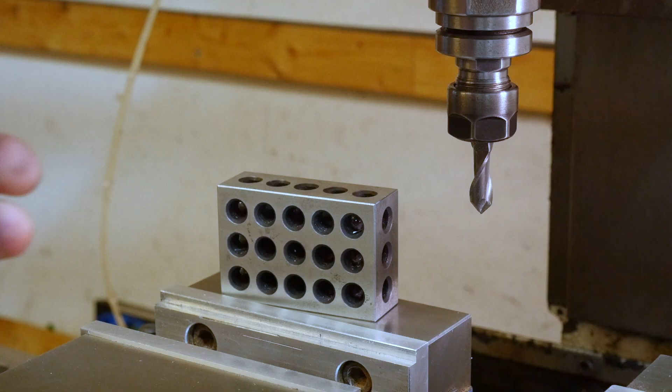One of the most commonly asked questions I get about Centroid is about tool height offsets. So if you're going to be CNC machining a part with a program that's using more than just one tool, we somehow have to communicate to the control how much each tool is sticking out of its tool holder, right? Like if you need to use this tool and this tool in your program, the control doesn't know how much each tool is sticking out. So you've got to tell it that.

And it's a simple concept, but the details of it sort of confused me for longer than I care to admit. So in this video, I'm going to do my best to explain exactly how it all works and what's going on in the control when you're setting tool height offsets, how to turn them on and off, and what it all means. And I think the best way to start is to sort of forget all about tool height offsets for just a second.

This is a 1-2-3 block, which means this edge measures exactly 1 inch, this edge measures exactly 2 inches, and this edge measures exactly 3. So I've set the top of this vise jaw to be Z0 for this tool. So if we go over to the control, this is the home screen in Centroid. Now you see mine has a black background, but that's just because I've changed it. Yours is probably blue. That's okay. All the buttons and things are going to be the same. It just looks a little bit different.

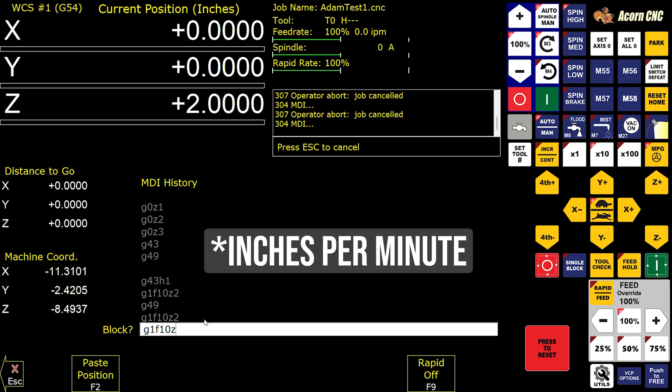So if we go to the MDI down here, this is the manual data input screen. We can go ahead and just start typing G-code in here. So we do something like G1, which is a feed move. So let's give it a feed of 10 inches per minute. And we're going to say we want to go to Z position 1. We hit cycle start. And we can see that the tool is moving to a height of Z1. You can see on the control, we stop at 1 inch.

And when we put the block underneath the tool, we can see that it just barely fits under the tool, which means that the tip of this tool is at a Z height off of this Z0 plane of 1 inch. We can do the same thing. We can go G1. Let's move a little faster. Let's give it a feed rate of 30, and let's move to a Z position of 2. Let's hit cycle start. We can see the machine moves up, and now we are exactly 2 inches off the top surface, which is our Z0.

Let's go up to 3. Now instead of G1, we can use G0. This is a rapid move. We don't have to put in a feed rate because our rapids are defined in the control. But let's go up to Z3, hit cycle start. And now we can see that our tool is exactly 3 inches from the top surface.

But things get a little different when we change the tool. So let's go ahead and change the tool to our tool number 1. We can see that this tool sticks out a lot less than the chamfer tool that we were using previously. So let's do a G1, feed rate of 30 inches per minute, and let's go to a Z position of 1. When we hit cycle start, the machine is going to move down,

and now it is no longer at the top of this block, right? This is exactly 1 inch above our Z0, but we've put in a different tool that sticks out a different amount. And without telling the machine how much more or less it's sticking out, it's not going to be at the top of the block or in the position we need it to be. So now let's talk about this concept of tool height offsets.

In Centroid, up here, you see H dash dash dash. There's no numbers here. There's dashes instead because tool height offsets are not enabled. To enable tool height offsets, there's a G-code, it's G43. So let's just go ahead and type in G43 and keep your eye up here on the dash dash dash. We're gonna hit cycle start on G43, and here you go, we have H1 enabled now.

If we want to turn off tool height offsets, we just go G49, and now we're back to H dash dash dash, and there's no height offset enabled right now. So I told you that was tool number 1. I do have the tool height offset already set.

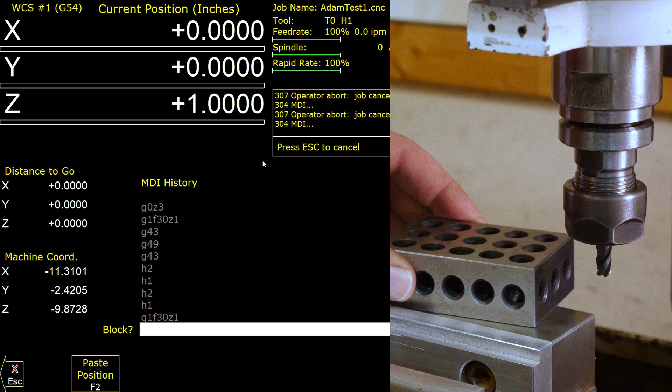So let's go ahead and tell the control to move to a height of Z1 when we have tool height offset 1 activated. And let's see what happens. Okay, so the tool moves down, and now we're exactly at the top surface of this 1-2-3 block. We're 1 inch above this surface.

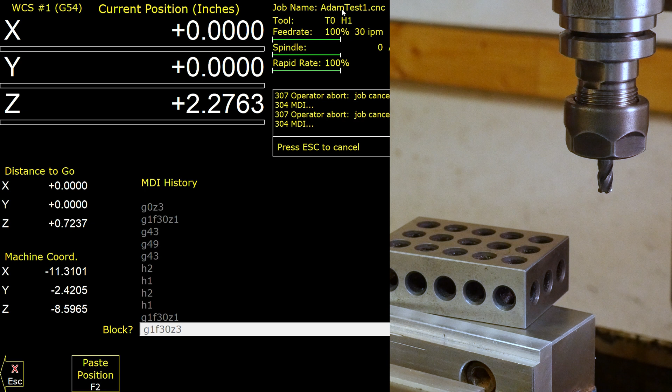Let's give it a G1 with a feed rate of 30, and let's move to a Z height of 3 inches. Let's hit cycle start. We still have height offset 1 activated. We see that we're exactly at 3 inches off of Z0 with height 1. And when we check with our 1-2-3 block, we're indeed right there. The tool is right at the top of that 1-2-3 block, just barely. I can feel it rubbing. So that's perfect. Now let's go ahead and change our tool to our tool number 2.

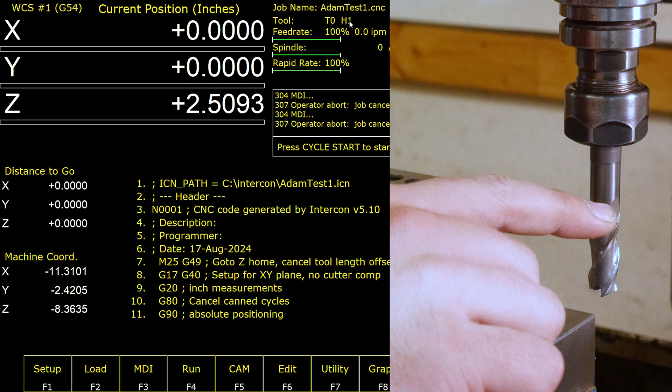Okay, so we've got our tool number 2 installed into the machine, and here we've got to be really careful, right? Because this tool sticks out a heck of a lot more. So if we don't have the correct offset set and the machine thinks we've got the stubby tool in there, well, we're going to crash right into the vise. We're going to hit something. So this is my tool number 2. Let's tell the control that we've got tool number 2 inserted.

Let's go back to our MDI, our manual data input, and let's say H2, and Z changes to 0.7179. That means that the space between the tip of this end mill and our Z0 is 0.7179. So this 1-2-3 block should not fit, which makes sense. Let's move the tool to Z1. And now when we put the 1-2-3 block in, we can see that it's right at the top. I can feel it rubbing, but this tool is right at a height of 1 inch.

So I think you get it now, whether the tool is long or short, we just have to find a way to communicate to the machine that that tool is inserted. And now, if we decide to turn our tool height offset compensation off with G49, we see here we have H dash dash dash, and the machine thinks we're in a different spot. We turn it back on, G43, and we do have H2 selected. It shows a Z of 1 inch again.

So I just want to show you these G codes of turning height offsets on and off and what the consequences are. And this is exactly what we want, right? We have 3 different tools, and when we tell the control which tool is loaded up, it accurately compensates for their heights. And so the question now is, how do we set those in the machine, and what does it all mean?

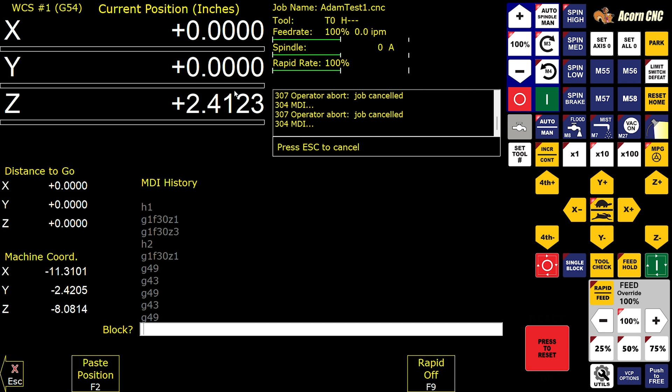You cannot set a tool height offset for H0 because there's no such thing as a tool 0, right? If we go to our tool offset library, there's no H0 here for us to even set. H0 by definition has a 0 for the height offset. And so to set tool height offsets, we have something called a reference tool, which is your tool 0. All the other tool height offsets are set from this tool. If you have a longer tool than your reference tool, it's going to have a positive height offset.

So this is our tool number 2, right? And if we go to our tool number 2, we can see that it is exactly 1.4123 inches longer than this reference tool. And our tool number 1, which was this end mill, is actually shorter than our reference tool. When we take a look at H001, it has a negative value, minus 0.3791. That means that this tool is exactly 0.3791 inches shorter than the reference tool. And that is it.

So what you could do is measure your tools. If you had a height gauge where you could measure the height of this tool from a surface plate or a flat surface, that's your reference tool. You set your 0 there, then bring the height gauge over and measure the difference. For this tool, you could literally plug that into your tool 1's height offset as a negative number because it's shorter, as minus 0.3791. And you can do the same thing for tool number 2.

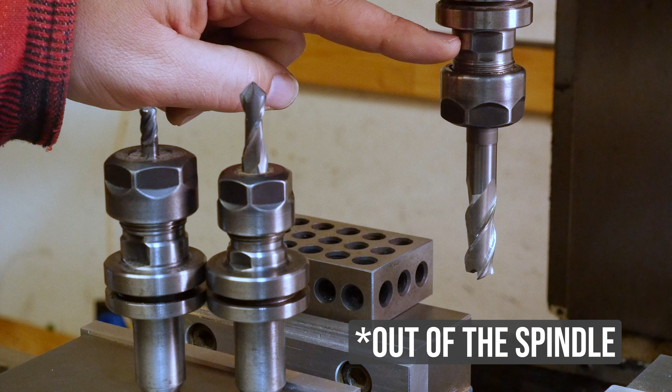If you took this tool number 2 out of its tool holder and measured it against this tool and noticed that it was 1.4123 inches taller, then you could literally just plug that value into the height offset for tool number 2 and you'd be done. You'd be off to the races. You have your tool height offset set.

And in industry, this is the way a lot of machine shops do it. They have little fixtures where they set the tools in the tool holders, and then they're able to measure how much it's sticking out, and they put their tool height offset into the control that way. But Centroid also gives you a way to do it in the machine.

A lot of us are probably not going to have these fixtures and jigs and surface plates or height gauges to measure exactly to the 1,000th of an inch how much each one is sticking out. So there's a clever way that Centroid's come up with that we can do it in the machine, and that's what we're going to go over next. So let's go over to the tool offset library again, and let's just delete these. Let's put zeros in here because we are going to set these from scratch.

Let's save these. So as of right now in our offset library, we have no offsets actually set, and we've got to go about setting them up. So we mentioned this concept of a reference tool. For a reference tool, you have to pick something that ideally you're not going to machine with. It's got its own dedicated tool holder, and you just keep it in your tool rack and use it as a reference tool.

Because let's say you get a new tool and you want to set its height offset, you are going to set the height offset of that new tool with respect to something, and that something is this reference tool. So it's a good idea. You could use anything. In this example, we're using a chamfer mill, but you could also use an edge finder. You could use a piece of bar stock or something and stick it in here. It really doesn't matter. And ideally you don't use it to machine.

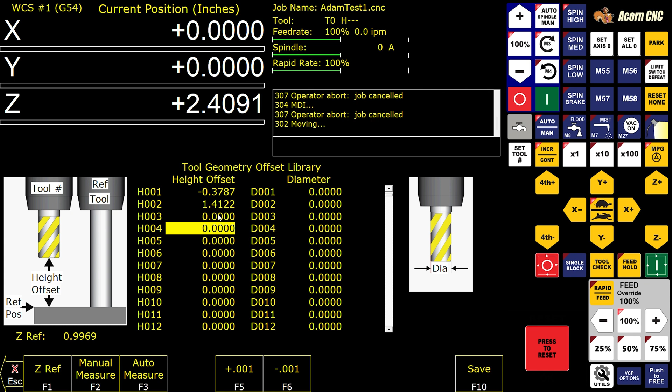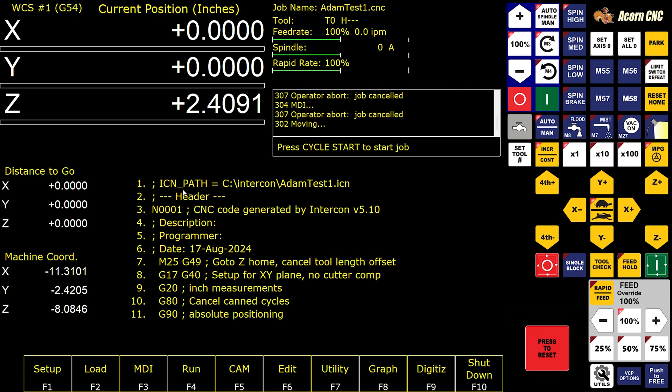So let's go ahead and prove that we've set these height offsets correctly. Let's go ahead and throw in the reference tool again. Actually, you know what? Let's not do that. I'll show you how to set. So now that the offsets are set, here's our home screen. We're going to go to setup. We're going to set up our part. So let's go next axis, over to Z. And right now we have tool number 2 inserted. So let's say we are using right now tool number 2.

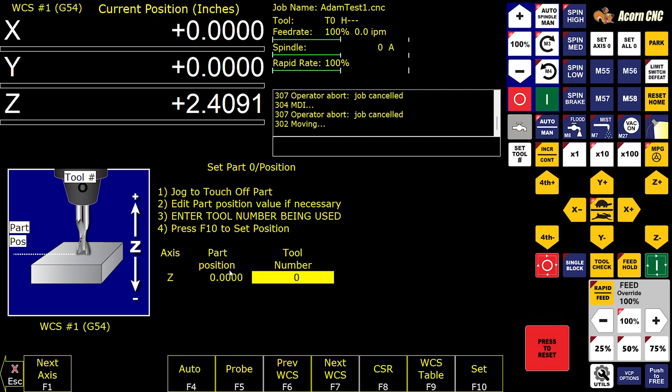And let's say we want to set Z0 at the top of the 1-2-3 block, when it's 2 inches tall. So let's go up. Okay. Now let's do this again until our tool number 2 is exactly at the top of this 2-inch tall 1-2-3 block. There it is. And so right now we're setting our work coordinate offset, right? So right now the control thinks that we are 2.4 inches above some 0, okay?

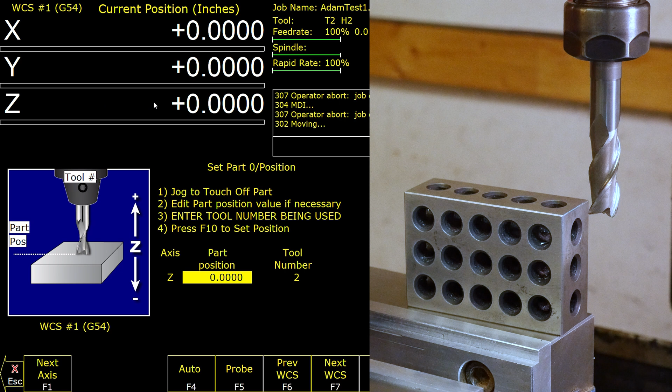But we're going to tell it we have our tool number 2 inserted, and we want the Z position with tool number 2 inserted to be 0 right here. So let's hit set. You can see we've moved to 0, and we have H2 height activated, right? So that means with tool number 2, this part position is Z0. So let's go ahead and go over to our MDI.

Okay, let's go to our MDI, and let's go G1 at a feed rate of 30, and let's go to a Z position of 1. So in theory, Z should lift 1 inch higher than it is right now. Let's see what happens. Okay, great. And so now, yeah, I can really feel it dragging right here. It barely goes in. We are 1 inch above our Z0, right? Because this was our Z0. Now we're 1 inch above it, and we've proven that we're exactly right there. Let's go ahead and change this tool out.

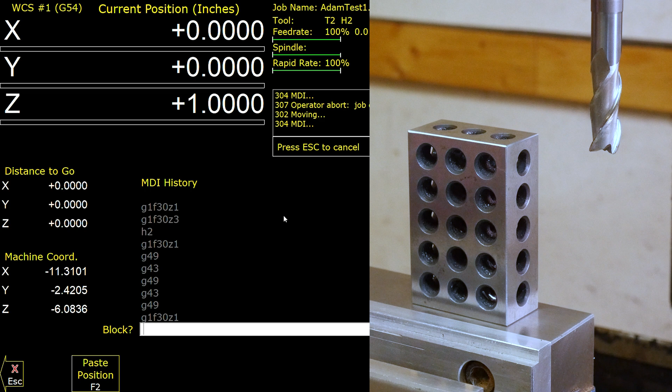So we got our tool number 1 back in the spindle. Let's go over to the MDI, give it a G0 at a feed rate of 50. Oh, sorry, not this. First we want to tell the machine to activate height offset 1. So we're going to hit H1 because we've got tool 1 loaded. And then now we'll go G1 at a feed rate of 50, and we will go to Z1. And we will go ahead and hit enter.

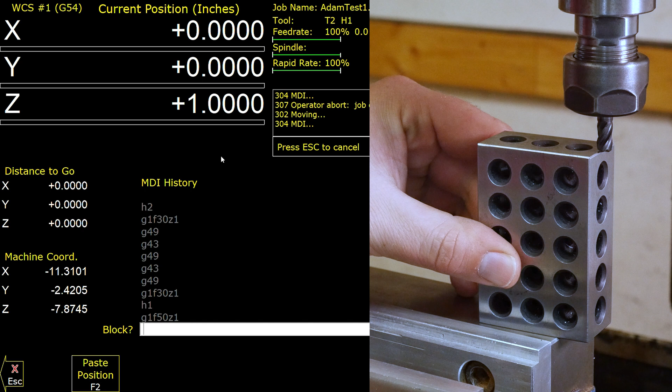And so now this tool should be exactly 1 inch above the top of the 1-2-3 block when it's in the 2 inch orientation, because this is the 0 that we set. When we go to 3 inches, we can see that it's sort of hard to get in there because it's right at the height of it. But you can see it's all working now, right? We have set our tool height offsets.

When we load in the different tools and we tell the control which tool is inserted, we are exactly where we need to be. And now we could run a CNC program with tools number 1 and number 2, and the program will finish without anything crashing, provided you've written the program right. Now the CNC control knows exactly where the tips of tools number 1 and number 2 are. So let's take it a step further.

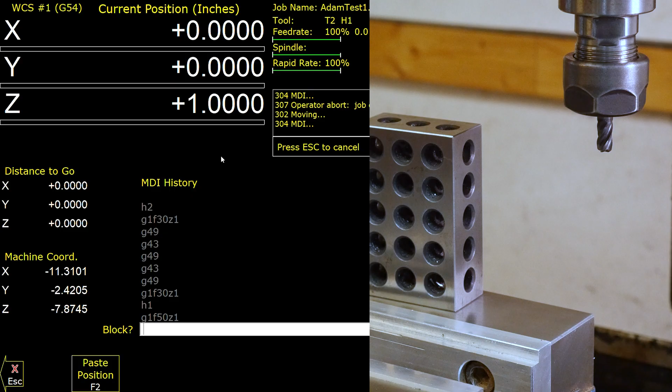Great, we've learned about tool height offsets and how to set them, and activating and deactivating tool height offsets with G43 and G49. But how does all of this apply to a CNC program? Well, the good news is all of that happens automatically in the background. So here's a little adapter plate that I've been making for a floodlight that I just installed.

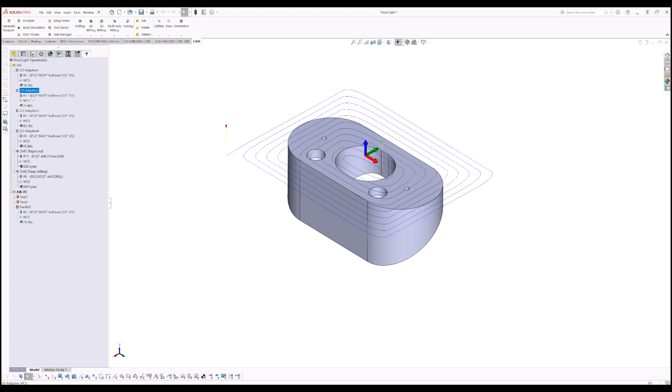But the point is, here we're doing work with tool number 2. We're coming in and doing a bit of an adaptive strategy with tool number 2. We're doing another adaptive with tool number 2, coming in and cleaning things up. We got more tool number 2, but then we switch to tool number 11. So let's post this code and see what it looks like.

Okay, so on the right here, this is the actual G code that we just posted for all of these machining operations. And this is just using Notepad on my PC. You should really use something better like Notepad++, which will format things a little differently and change the colors of things so that it's easier to read. Because this is mostly very difficult to read.

It's many, many lines. So just to do everything in job 1, this is how many lines of code you're actually dealing with. The lines move in increments of 5, so we're at 32,000 divided by 5, which is 6,400 lines of code to get this thing machined. So it's a lot of code. It's mostly difficult to understand and hard to read, but let's take a close look at the first few lines.

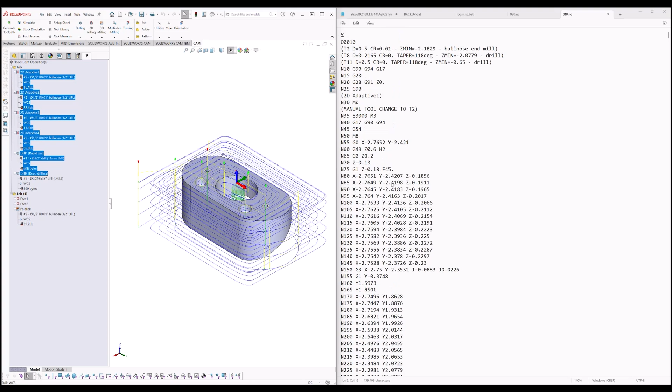So the way this program starts is this 2D adaptive 1 with tool number 2, which is a bull nose end mill. But let's look at some of the G code here. Mostly, I don't know what any of this stuff means, guys. There are a lot better programmers and CNC guys that would be able to tell you exactly what all of this means. I cannot tell you because I don't know.

But what I can tell you is, look at this right here: G43. Before we start machining, G43 is activating the height offset for tool number 2. We were doing it manually in the MDI, but all of this happens automatically. So let's go to the very bottom, because drilling doesn't have as many lines of code. Here I see a manual tool change to T8. That's because the very last operation is drilling for tool number 8.

Let's see if we can find tool 11. Here we go, here's the first drill 1. And where is our tool number 11? Here it is, G43, activating height offset 11 for our drill number 11. Then we go a little further: G43, activating height offset 8 for tool number 8. So all of this happens automatically in the post processor. The G code is generated, but that is what the G code is doing.

It took me a little while to understand the concept of G43 and G49. The good news is, if you follow this video, you will probably still be able to get up and running and machining, even if you don't fully understand what G43 and G49 do, because it all happens automatically in the code. Whether you measure the tools, or use the process available through Centroid where you load the reference tool, touch the reference surface, and then touch the other tools to that surface while hitting manual measure.

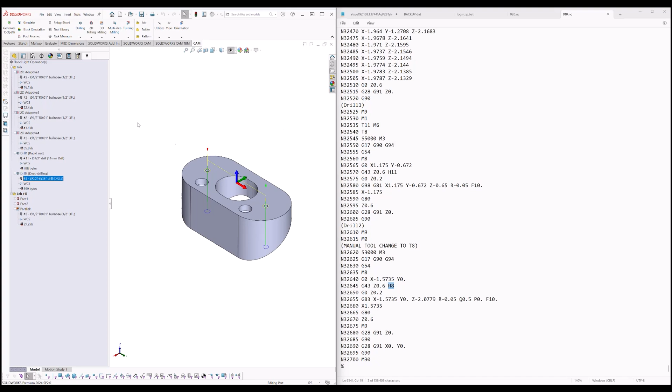If you can set the tool height offsets in the control, however is most convenient for you, you can program a part in CAM, and when you post-process the part, all this G43 stuff happens in the background. I hope this video was able to clear up some of the confusion with tool height offsets and how it works with Centroid.